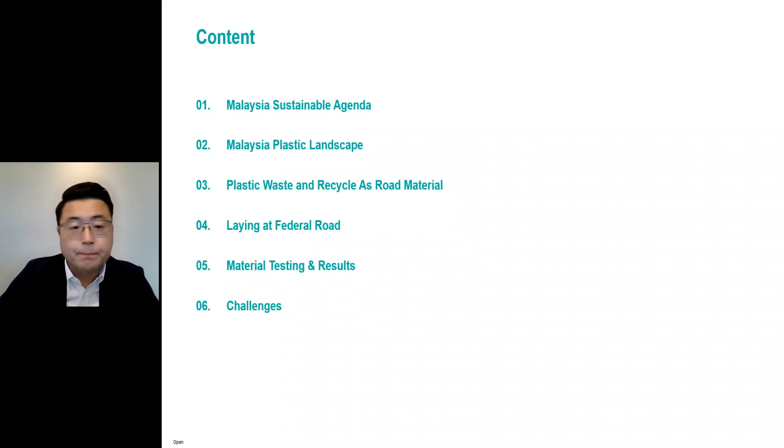So I touched a bit on the Petronas sustainable agenda as well. The development of this waste plastic modified bitumen creates an opportunity for Petronas to employ our technologies and approach towards economic activity. Not only is it environmentally less harmful, but it also preserves resources, which is important in supporting our sustainable agenda associated with net zero carbon emissions through repurposing existing material, besides implementing good practice of waste management and recycling solutions. So Petronas' effort in developing this modified bitumen from plastic waste is also aligned with goal number 12.

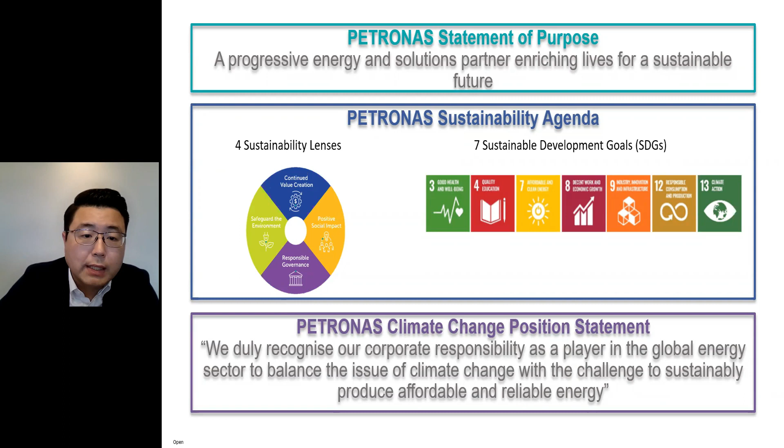Okay, now we jump into the Malaysia plastic landscape. So just now I mentioned about Goal 12, which is responsible consumption and production. So how well are we doing in terms of recycling? As you can see, tonnage of material recycled includes plastic, aluminium, paper, glass, steel, battery, and other recyclable items. We can see millions of tons of waste are recycled every year, and the trend is increasing, from 28.1% in 2019 up to 31.5% in 2021. This has been kept tracking, just that 2022 has not been reported, that's why my data stops at 2021.

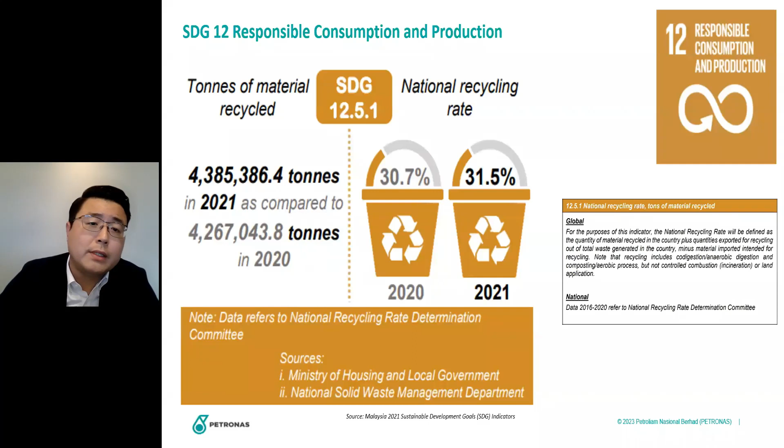Okay, so what has actually been recycled all these years? Next we look at this table, which shows what kind of material has been recycled throughout these few years. Of course you can see plastic waste, aluminium every year, and also glass, steel, battery, and others. So our focus now is actually on the plastic.

As you can see, plastic surprisingly went from 1.5 million, jacked up to 2.7, and dropped down to 1. I believe in 2020 it's because of the pandemic, it used a lot of plastic, all these things, and in 2021 it reduced back. So yeah, a lot of people will say 2020 is actually not appearing well. So fine, let's look into the plastic.

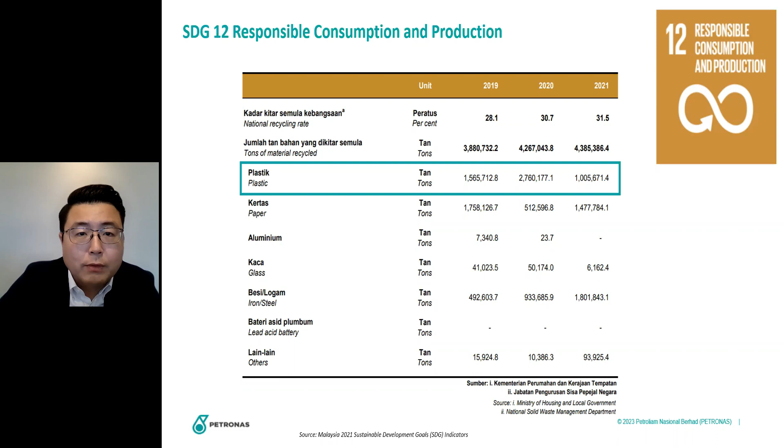Okay, so I will be focusing on these 4 plastic resins, which are PET, HDPE, LDPE and PP. These 4 major plastic resins are actually being recycled the most and most frequently. The rest have less chance of recycling, I would say, because there are actually 1 to 7 types of plastic here. I'm focusing on 4: number 1 is PET, then number 2 HDPE, LDPE, and PP. So I'll just highlight the importance of all these plastics.

So one of them is PET, which has good thermal properties. By the way, PET is mostly used for our mineral water bottles, the body is actually PET. Another one, HDPE, is a stiff material, as you know. Most of it is food containers, milk and juice bottles, all these things. HDPE is used for food containers, milk or juice beverage containers, which you can see are quite thick, quite hard, and also less transparent.

So another one very frequently seen in the market is LDPE. It's actually a thin film-like material, and it has very high strain, I would say it can have very high elasticity. Yeah, so not elastic, plastic. Okay, so after that, you can see most of it in plastic bags. Even water tanks sometimes use LDPE, which is actually very thick.

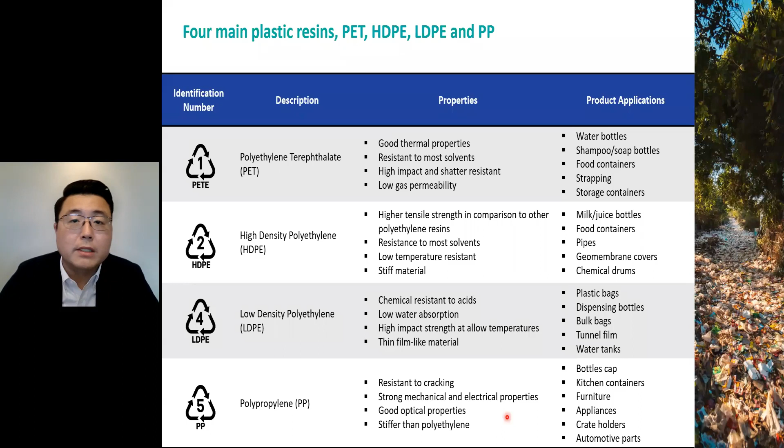Okay, so next we look at how Malaysia produces plastic and what the usage is. This survey is from 2019. You can see that for the two plastics, PET has plastic packaging and PET packaging, and also PET polyester, and the next ones are PP, HDPE, and LDPE.

Okay, so the next one, where does it use for? So you can see that most of the plastic is actually used for packaging, which is 48% of it. The second one is electrical and electronic, and most of this 27% is the PP plastic. After that, the rest is automotive, constructions, households, agriculture, and others. So this is what we used in 2019.

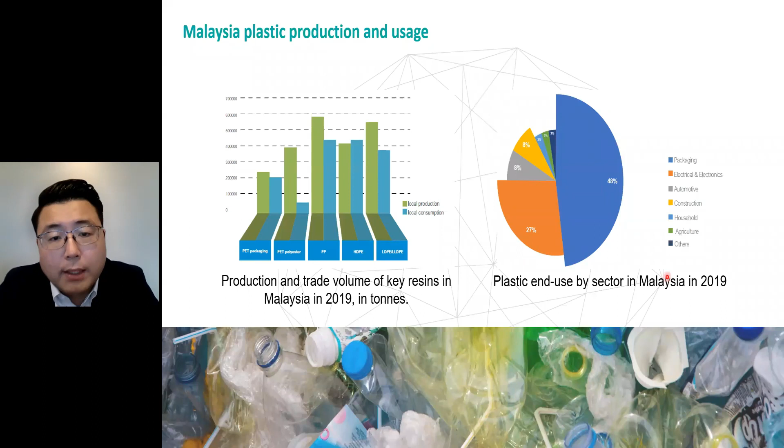Okay, next, how is the plastic waste generation in Malaysia? Do you notice that each of us generates 0.85 to 1.5 kg per person per day, and 0.14 to 0.37 MT - this is not metric ton, it's actually million ton - of plastic waste leaks into the oceans, so we call it marine waste. It's actually quite serious, and it's estimated that by 2050, plastic will be more than marine life. So this is quite serious.

So after that, we can look at the post-consumer plastic waste generation, which is mostly from individuals. In 2016, it was 1.07 metric ton, and it increased to 1.4 metric ton by 2019, and this problem keeps increasing.

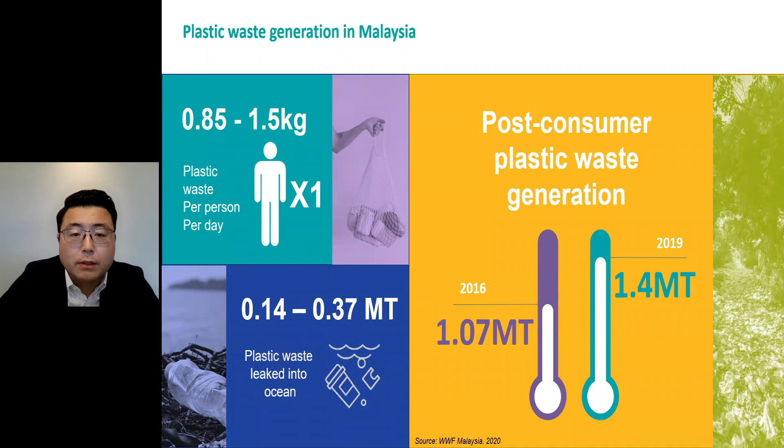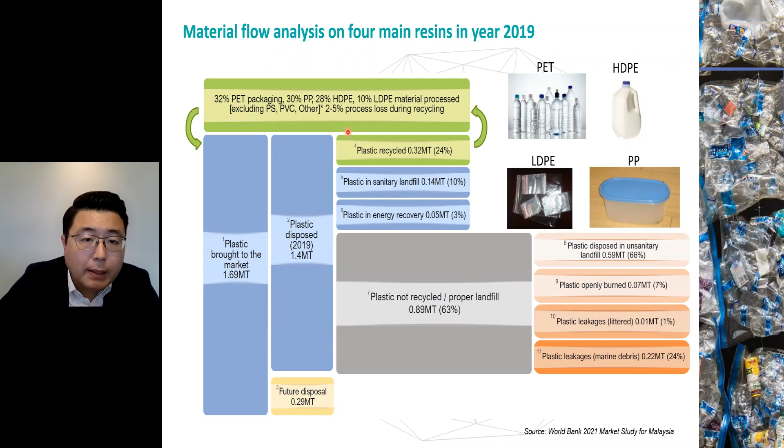Okay, so next we look at this value thing. What is CFR? CFR is actually the collected for recycling rate. So they did a study in 2019 on how much plastic has been recovered. PET is recovered the most, because it's the easiest to be recycled and collected. Then second will be PP, then subsequently followed by HDPE and LDPE. So you can see all these resins covered in this study in Malaysia are the most valuable recycled products.

So if let's say we are able to recycle all this plastic that we have used, which is 1.4 million ton, we can generate about USD 1.3 billion per year. But because only 24% is being recycled, you can imagine how many millions we have lost.

So this has resulted in losing about USD 1 to 1.1 billion every year because we never reuse or recycle the plastic. So when we talk about recycling and reusing plastic, we definitely have heard this term - we call it the new plastic economy, which means we turn whatever plastic waste into something usable.

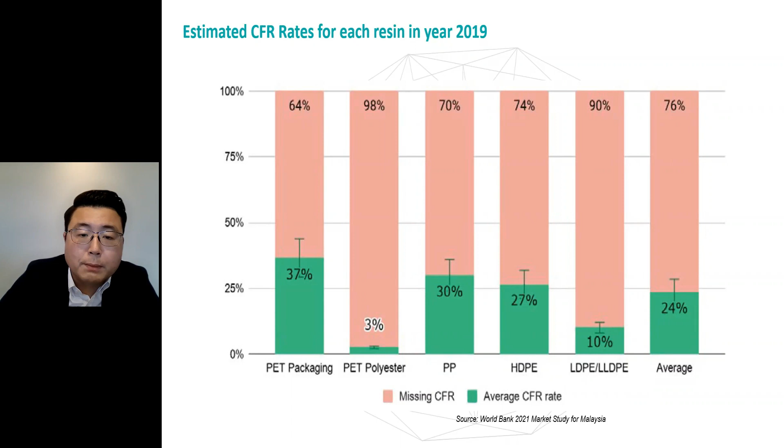So this will be my next slide. What if the plastic can be used and reused again and channeled back into the value chain infinitely? That's why, as I mentioned earlier, USD 1 to 1.1 billion will be generated from the waste plastic. So we have to change our mindset from plastic as a waste to plastic as a resource.

This is one of Petronas PCG's new plastic economy ways of changing it - through education, cleanup, infrastructure, and innovation. One of the major breakthroughs we have is actually to introduce plastic into the bitumen. But the question would be how, and how will it affect the bitumen and the road?

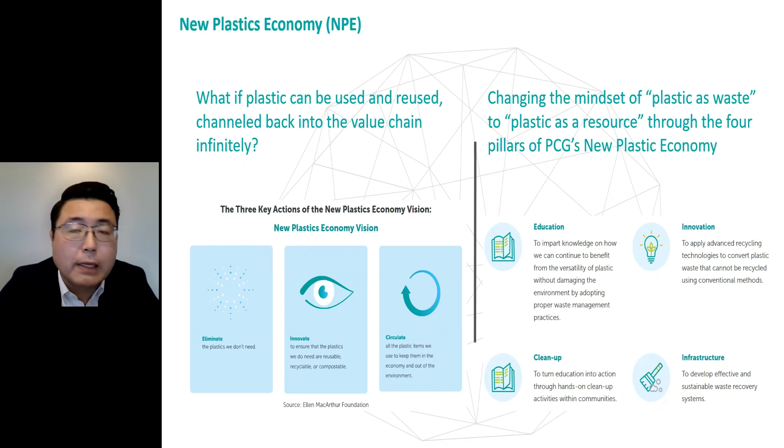That brings me to the next topic, which is plastic waste as a recycled material for roads. Now we talk about roads - the plastic part already covered how it's being wasted. But when it comes to roads, we have a lot of issues as well. As road users, especially engineers and authorities who travel a lot every day, most of the time you feel angry or irritated by road conditions.

All these road conditions, we have compiled into a few factors - these are the pain points we identified during our study. There is actually high traffic load and heavier vehicles that exceed the design intent. It's not that we purposely design lower, but sometimes the traffic is very high, or maybe more than the growth rate, or maybe some illegal vehicles using the road, so we definitely exceed the design intent.

The next thing is that the intensity of heavier vehicles on the road definitely reduces the life cycle of the road - it's directly proportional, heavier load to shorter lifespan. After that, of course, there's lack of maintenance, because you have a shorter lifespan that you didn't expect to deteriorate that fast, so it's out of your maintenance program. That's why normally you see a lot of potholes or road damage due to lack of maintenance.

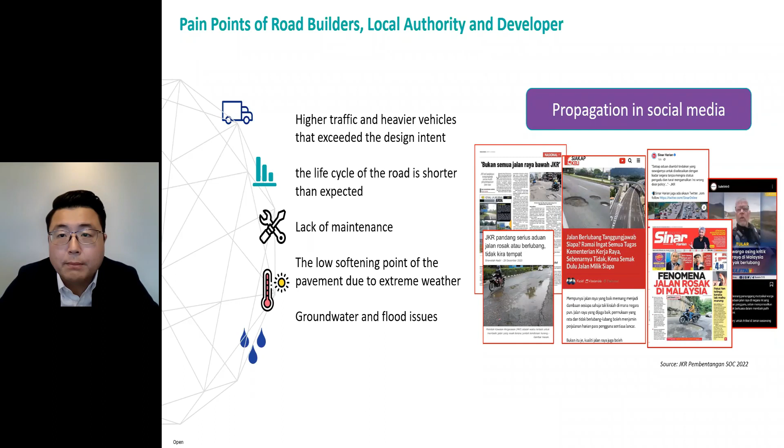This is where the plastic modified bitumen comes in as the solution. So what is the solution? The bitumens or premium asphalts being introduced have safety as the priority, but not only safety - we also look into comfort and sustainability. So the idea is to add recycled content inside the bitumen, and secondly, adopt a sustainable specialty mix that fits perfectly into the global sustainable trend.

The modified bitumen or modified binder offers the following benefits: resistance to rutting, fatigue cracks, cracks due to binder hardening, and improved adhesion of the binder to aggregate. This is what a premium binder can normally offer.

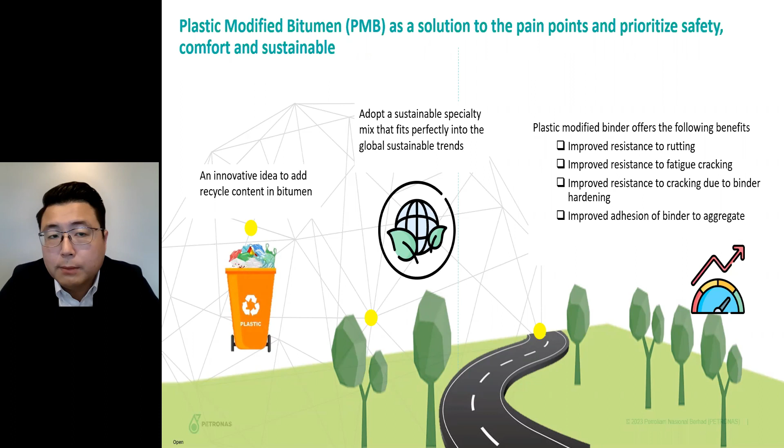So next, what is the goal of the plastic modified bitumen? It is to increase the quality of the road, the safety, and the comfort of the user. Safety, of course, is the topmost important thing we need to take care of, because if you have a low quality road, you have a lot of issues like potholes, and potholes actually kill people.

So this is the one that we don't want to happen. Secondly, of course, you will see a lot of uneven surface and cause a lot of issues on the car, all these things. So that will be linked into the second one, which is comfort. The more flatter or more even the road, the more comfortable ride you have.

So imagine you have a nice car, but then the road - I heard one person tell me what they call it, the road on the moon, something like that. So definitely you don't feel it's comfortable if you're driving on it. So of course the next one that will disturb you a lot is the noise generated.

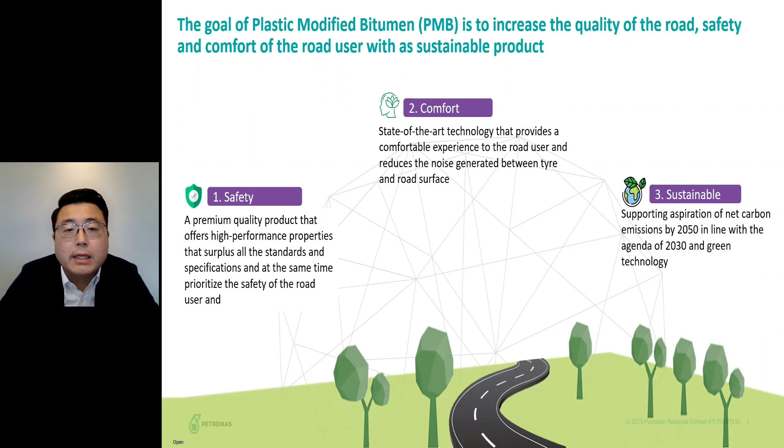The PMB is able to reduce noise generation between the tire and road surface. So thirdly, of course, all these products that we are doing right now are actually sustainable, which is supporting the aspiration of net carbon zero emission by 2050 and in line with the agenda of 2030 and green technology. Okay, so next will be the benefits.

So we talk about the benefits of using this kind of premium modified bitumen. Of course the lifespan can conservatively be extended a minimum of 25%, and that will reduce the OPEX operation cost, which is the reduced maintenance schedule. So that is for the authority or developer.

For the road user, of course, you have safety and comfort, and also reduced noise. For the automotive industry, it will perform better in various weather conditions, and it improves the lifespan of your tires and reduces vehicle maintenance costs, because all these vibrations - and also to minimize fuel and reduce driver fatigue is very important if you have a great road.

Okay, so after that we will also look into the environmental benefit, whereby if we use plastic waste to lay the road, we can reduce up to 16% of the plastic pollution in Malaysia. At least you can see a reduction in landfill, because most of the plastic at the end of the day is actually landfilled, which is using up earth resources and space, which is definitely not a sustainable solution.

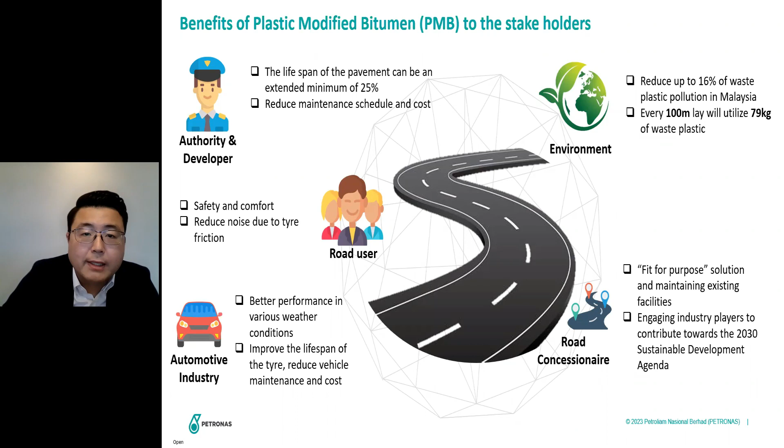Okay, so we've covered all the benefits and how it contributes back to society and the environment. So the next one will be the interesting part - how it's being planned. So this is the plastic modified road, from plastic waste road to the plastic road. So how is it being implemented in the road, and the end product?

You can see here, we started with the waste plastic and also raw bitumen. The raw bitumen in Malaysia right now is 60/70. After that, the plastic is shredded, and then we put it inside the bitumen blending facility. Then the output will be the modified binder. After that, we send it to the premix plant with aggregate. Then the end product can be laid on the road - we call it the plastic road. So you can see here all the plastic waste that we are using.

So after the segregation is done, you need to shred it into what they call plastic flake. This plastic flake, of course, needs to be dried out completely, because bitumen is quite sensitive to water and moisture.

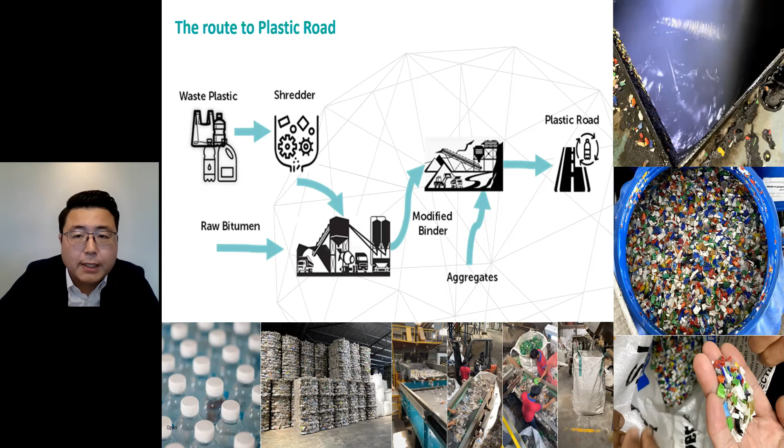So it's about how many years? 1.5 years now from then.

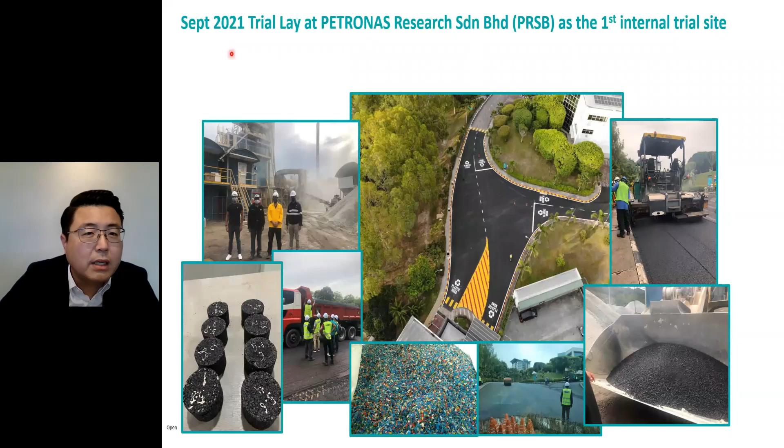So the next one we have done is we expanded our laying into a federal road. Of course, this one we collaborated with JKR to lay at the federal road, which is at FT 185, Jalan Simpang Pulai Lojing. I'll let you know further details on this road later. But you can see that all this process, from the internal lay up to the external lay, uses the same material, which is plastic modified bitumen. We are quite happy with the result, which we'll show you later.

Okay, let's move on. I'll be focusing on this federal road laying, because the internal one, due to lack of traffic, cannot be a showcase. So we make this the main one.

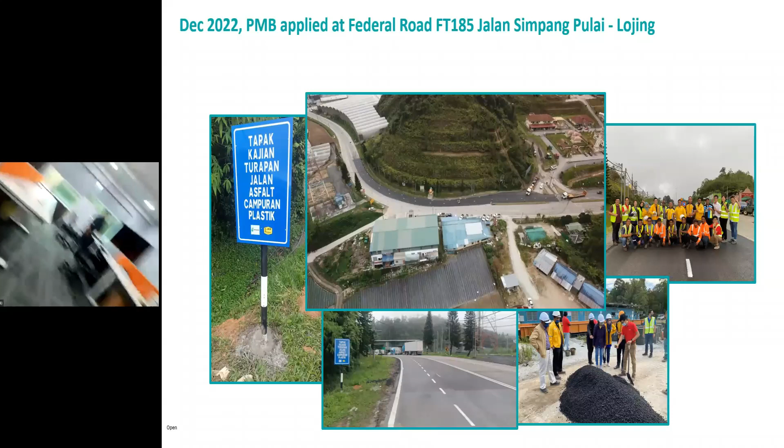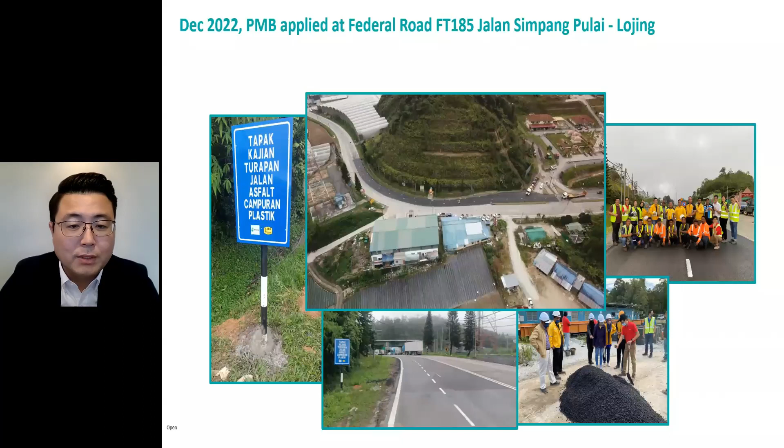Next, we move on to this laying. This project is the laying at FT 185. So next is the location. This laying is somewhere around between Perak, Kelantan, and Pahang, because the road is actually crossing these three states. If you zoom in, it's actually here, crossing these three states.

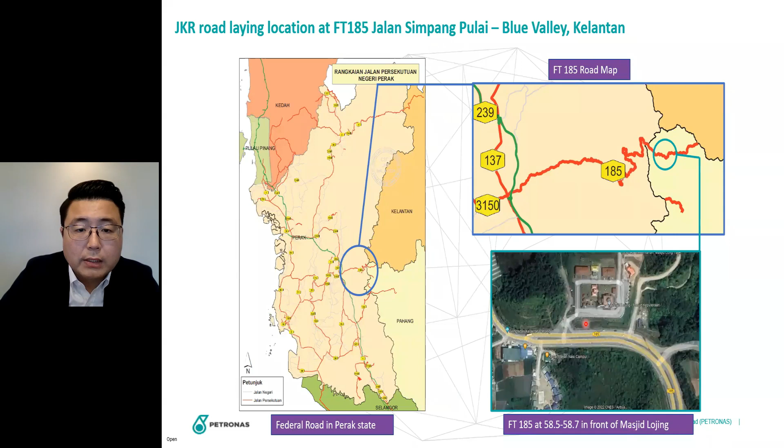So the place where we are laying is somewhere around here, which, if you look it up on the map, is actually in front of Masjid Lojing. So the next one will be this.

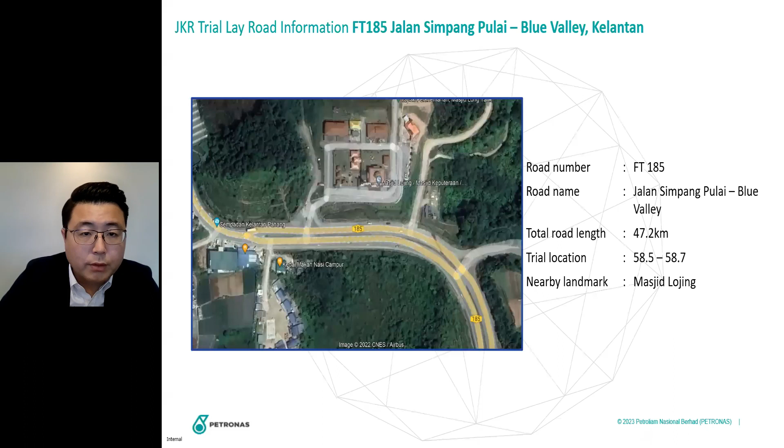Okay, so this is actually the exact location where we do our laying. The road length is about 47.2 km, which is why it crosses from Perak until Pahang and also Kelantan. And the nearby landmark is actually Masjid Lojing. This is the details of the trial sections and also the control sections.

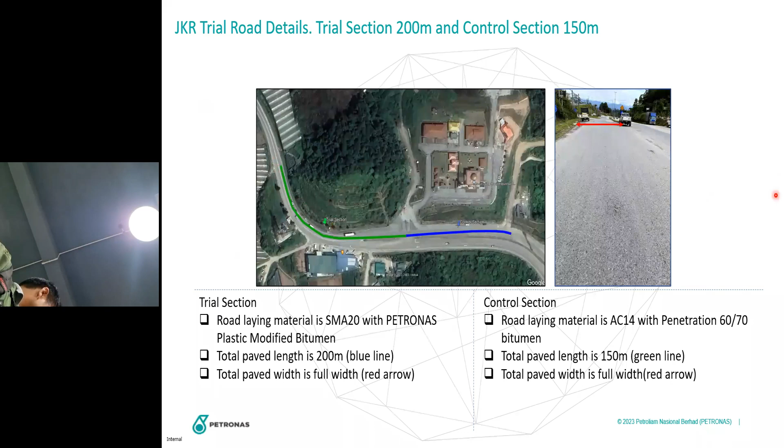So these trial sections, the blue color one is the... this blue section is the 200-meter with the PMB.

So for this PMB, the details we are using SMA20, and the green color is actually the control area, which is requested also by JKR authority to have these control sections for monitoring purposes.

But it is using AC14 60/70, and the pave length is 200 against 150. Supposed to be 200 because up to corner level, so which is not a fair comparison. That's why we don't proceed, and we shorten it.

And also the pave width is actually the full width. This is shown in the red color, which is the full width of the road. So total length is about 350 meters.

And some of you might be asking, so it happened that you want to do a comparison, why not use AC14 premium mix, which is the AC14 with modified bitumen, against the AC14 with the standard bitumen.

So the reason behind it is actually we want to test our bitumen technology. It's very important to note that we have done the initial assessment before the laying, and we found out AC14 is unable, to be frank, to resist the high loadings and also high traffic.

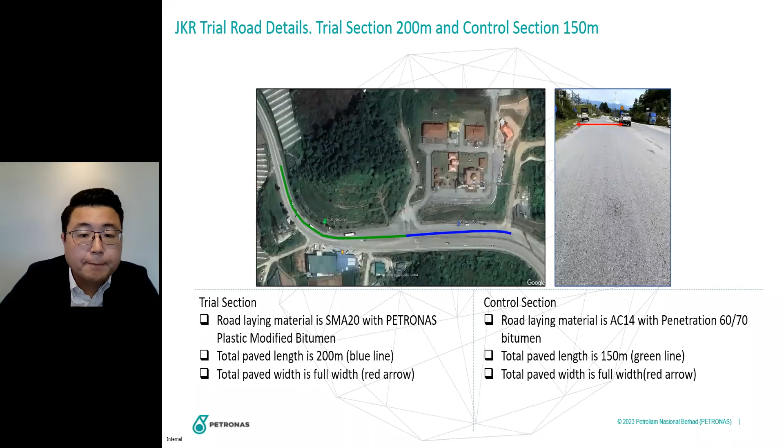Next, I will show you the material testing and the result.

So of course, what kind of specification are we referring to, for SMA20 we are referring to JKR, and also the fiber pellet, because for SMA you need to use fiber. And of course, so far we are referring to the polymer modified binder, because one of the requirements in JKR when you want to mix with SMA is to use performance grade of 76.

So this performance grade of 76 is definitely the polymer modified binder, the only binder that's stated in the 2008 S4 specification.

So that's why our PMB also, we are referring to this plastic modified binder spec. Of course, later on there will be a specification specific to this plastic modified binder.

So in this polymer modified binder, they are targeting PG76. That's why, as you can see here, the dynamics are tested to 76 degrees, which is also the PMB, the plastic modified binder, we also tested to this 76, to qualify that this bitumen is able to achieve this grade, PG76.

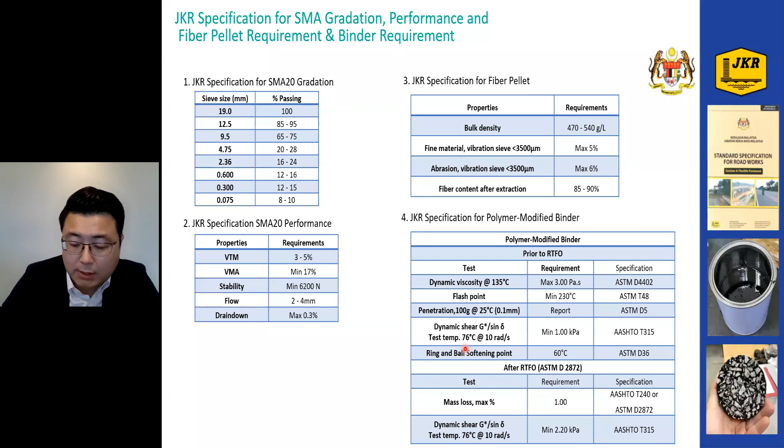Next, I will let you see some of the tests that we have conducted for this modified bitumen and asphalt. This kind of test is also one of the requirements that JKR imposed on us, that they need to see this result before they get approval.

To be frank, I'm showing all this result to you. Most of it has already been submitted to JKR.

And for the plastic modified binder, of course you test all these properties, including the dynamic shear of unaged and also short-term aging, RTFO, and also the compacted mix. This is all the normal tests, and also they have asked for the resilient modulus, dynamic creep, Cantabro, semicircular bend, and also wheel tracking test. And of course, the core sample will be tested for density and also the layer thickness.

So all this photo, if you can see, this picture particularly is actually the PMB. It doesn't look any different from other bitumen, to be frank. This is the Marshall sample, from the loose sample, and this is all the core samples from the road.

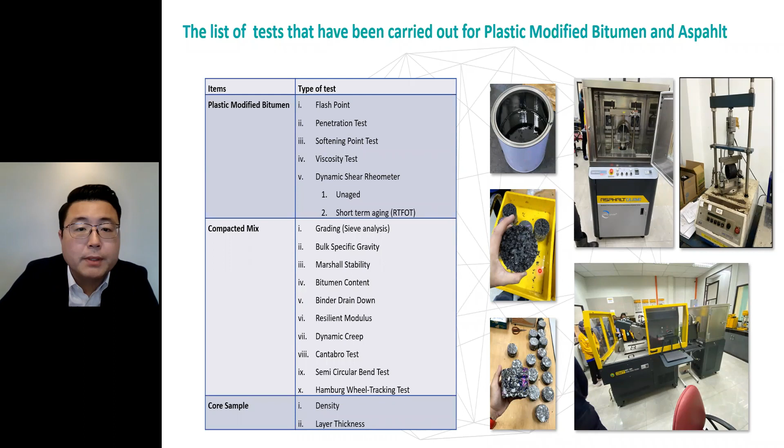I'll tell you about the requirement of the PMB. We are actually achieving the requirement of polymer modified bitumen. That's why in our test, we also tested the normal or conventional PG76 against this requirement, and also compared it to the PMB, plastic modified bitumen. Whatever test we conducted is able to achieve PG76 easily. It's worth noting that 60-70 is actually the penetration rate, but when you come to a higher, better binder, normally you call it PG76.

In fact, if you convert into a binder grade, it's actually PG64, which relates to the 76 degree I mentioned just now. For binder grade 64, they put it back to 64 degrees so that you can achieve a minimum of 1 kPa for the dynamic shear, mostly for the rutting purpose.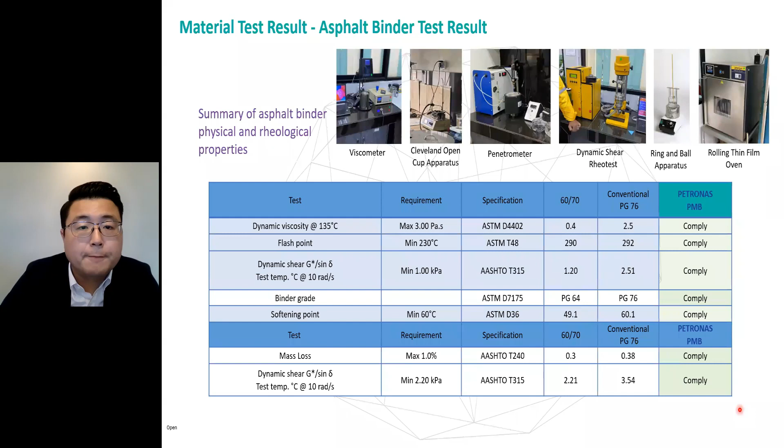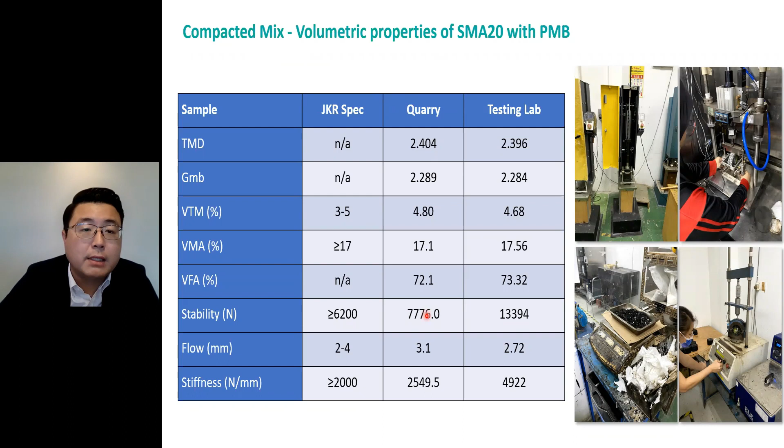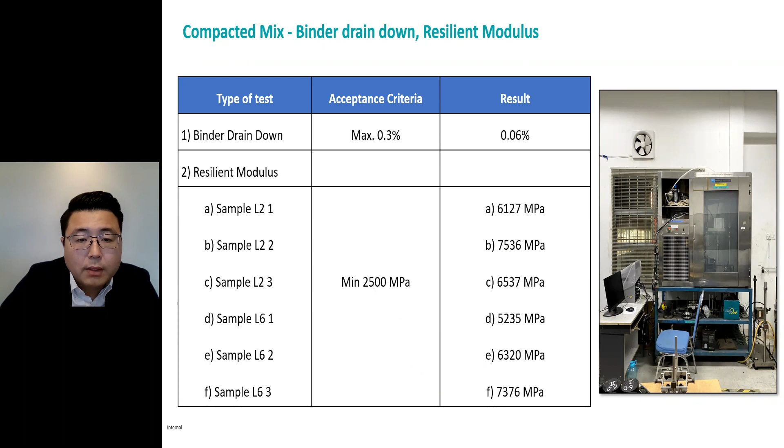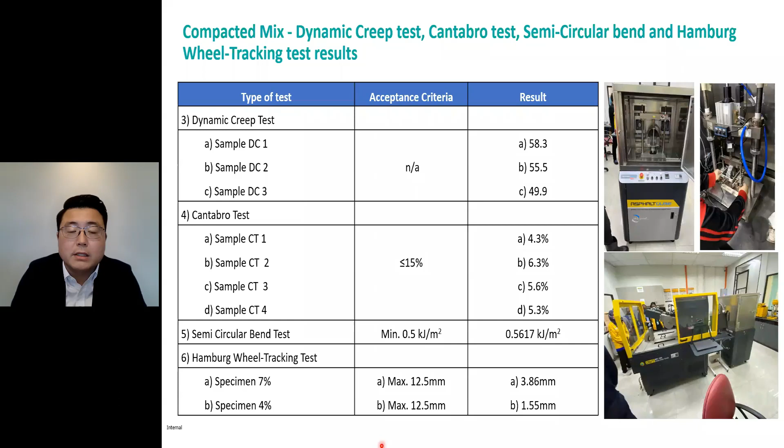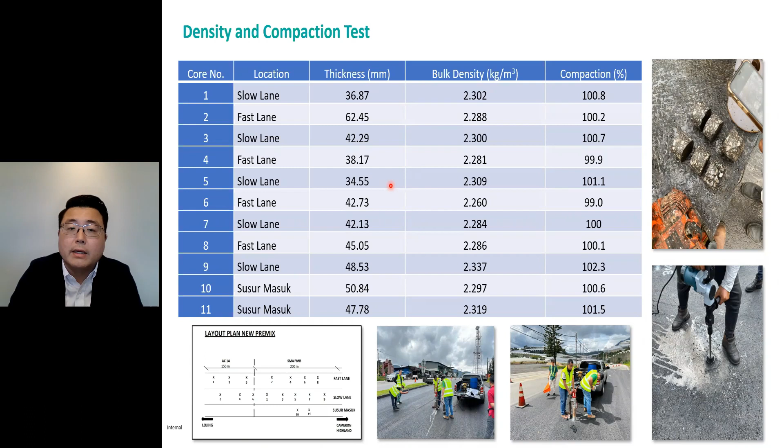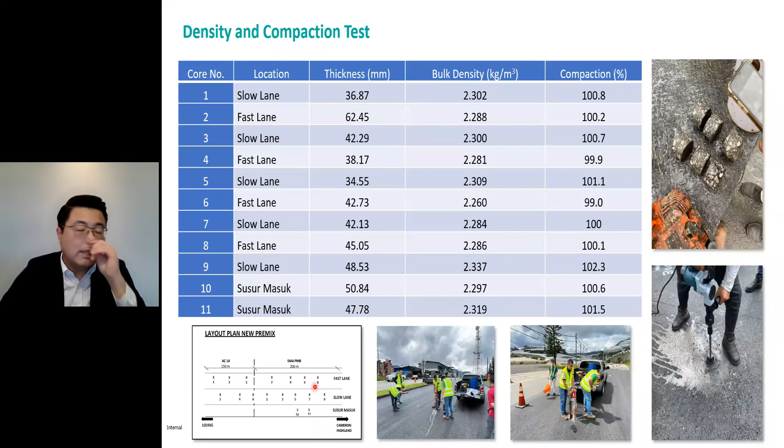Okay, so if you look at what is slow lane, fast lane, if you look at this draft sketch, the sketch is actually because the road is 2 lanes with one deceleration lane. So we put it as a fast lane, of course the most right lane, and the left lane is actually slow lane, and the most left one is actually the deceleration lane.

So this is the number of cores that we have done. And of course, for AC14 as a control area, we also need to test it. This result is not going to be shown because my focus will be on SMA.

So this is all the photos that they have taken. This is taken 24 hours after the lay. You can see that the road has not had any road marking put on it yet.

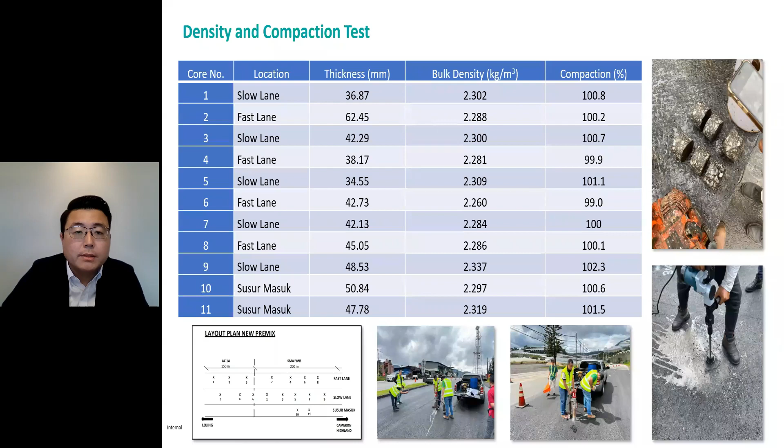So, okay, all from what I have presented just now is about the performance and the mixtures, and how it is whether you can achieve the key aspects or not. You can see all the results are actually in very good shape, I would say.

So next, of course, for any new technology there will be a lot of challenges, because it's something new whereby if you don't have the spec, people will question whether it can be done, or how it behaves, especially plastic, which you use every day but never thought of putting inside this mix. Also research-wise, if you search through ResearchGate or even the internet, not much info or research has been done. So you face a lot of challenges during this stage, especially since this was actually done like 3 to 4 years ago.

So now you can slowly see all these plastic things coming out, but most of it is still under the research phase, I would say. So of course, we have identified a few challenges during the lay, of course.

So the first one is the challenges in the premix plant. One of the problems, actually the same goes for most modified binders, is that we need to maintain the temperature. Because for any modified asphalt in the market, you require higher mixing temperature compared to the standard unmodified bitumen. The standard bitumen temperature is about 160 during mix. So definitely for modified bitumen, it requires higher.

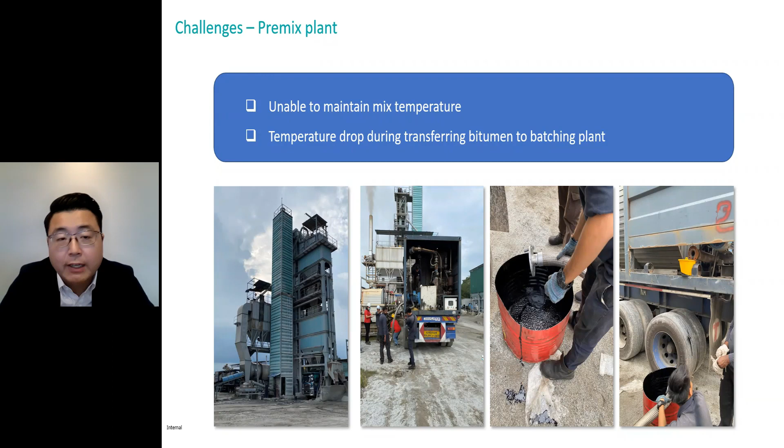Next will be during the construction. The construction in this, what do you call it, Jalan Lojing or Simpang Pulai Lojing area. As you know, this is one of the coldest areas in Malaysia, in Semenanjung.

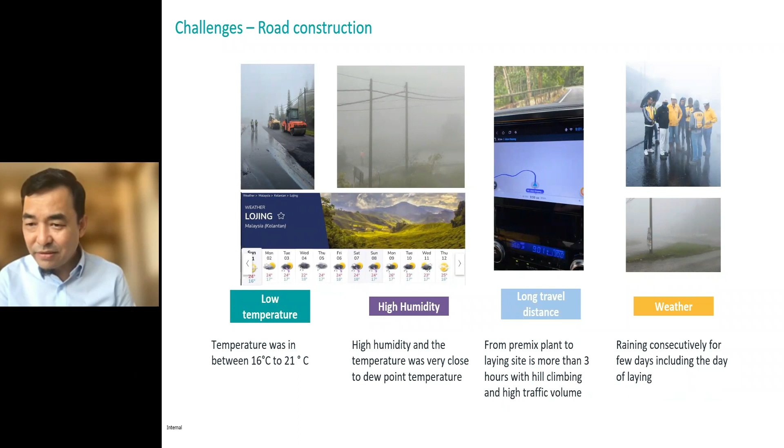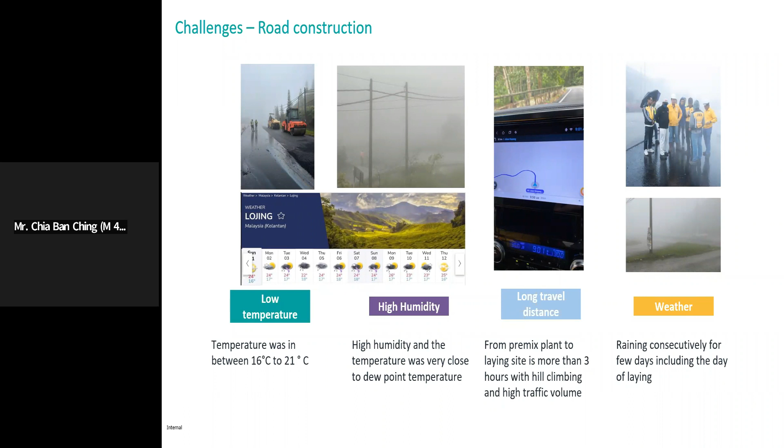Sorry, someone talking. Mr. Chia. Hello. Mr. Chia. Ban Ching, can you mute? Okay, okay, mute. Okay, thanks.

Thanks, Dr. Zara. Okay, yeah. The next one is actually during the road construction. As you know, this area is one of, I would say, one of the highest areas in Cameron, because I needed to travel 30 minutes from Tanah Rata to get there. And when you are getting there, the road is actually going uphill, not downhill, so it makes a lot of trouble for us.

So okay, first thing, of course, is the low temperature. We have been monitoring the temperature there for more than 2 months, 2-3 months, and we look at the temperature - it's always either low temperature or it's actually raining. So it's causing us a lot of problems, because you don't want to lay your road during raining conditions. So of course, this is one of the biggest challenges in our road construction.

The next one is high humidity, and actually very close to the dew point temperature. What is the problem if you have high humidity? It means that whatever prime coat or tack coat you put cannot dry. Even if you use the rapid setting, the RS type of tack coat, you still need to wait for a few hours to dry, which tremendously jeopardizes all your laying work.

So this is one of the problems that I'm facing during the laying.

The next one is of course long travel distance, because you hardly find a premix plant in Cameron Highland, to be frank. So the nearest one is actually in Kelantan or in Perak. Both require about 3 to 4 hours to travel up, especially near public holidays or during working hours when there's a lot of traffic there. So we face a lot of problems during this, because as I mentioned, temperature is one of the sensitive elements in all premix, or even the premix hotspot.

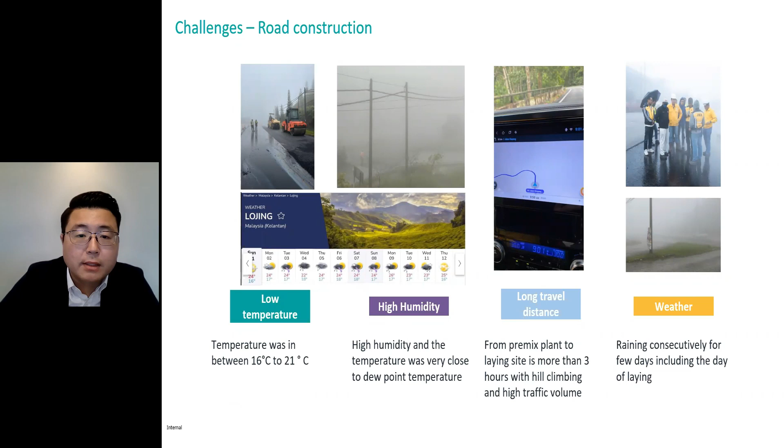Okay, it's very challenging. Next is the existing road conditions. I would like to share with you how serious the road damage is, and this is why we decided to go for SMA - not even 14, but actually 20, so that it can help resist the higher load, because we see a lot of Balak trucks passing by. Even when we were sitting there for discussion, we saw a lot already.

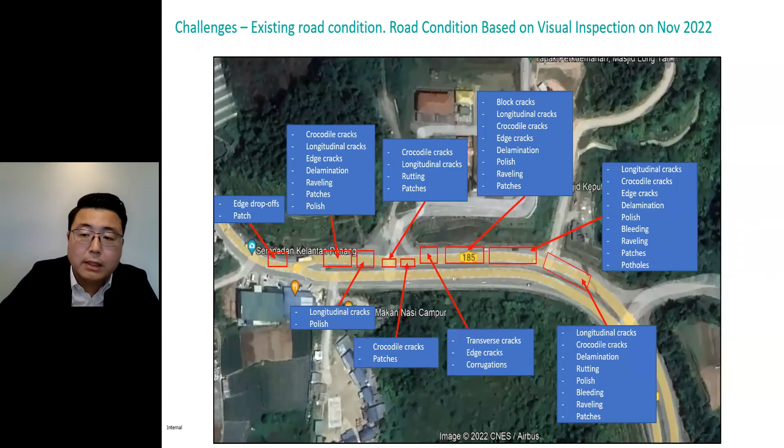So this is the defect that we identified along the trial lane. You can see cracks are common, patches are common, rutting is also common. Delamination and raveling are especially common, due to lack of maintenance. This is, for me, kind of a perfect place to test my product, of course. I'll show you some photos of how serious the defects are - you can see a lot of crocodile cracks, longitudinal cracks, and also block cracks.

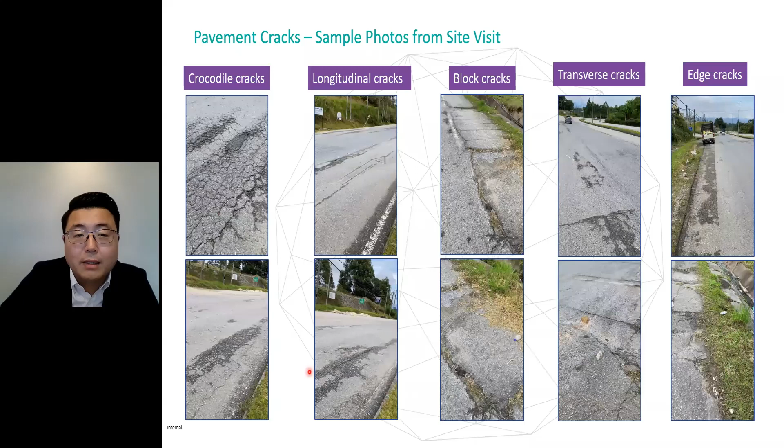And you can look at the road - you will see a lot of wet spots. That is actually another serious issue that we are facing, whereby there's underground water. Next you can see corrugation, depressions, rutting is everywhere - you just name it, you can find it.

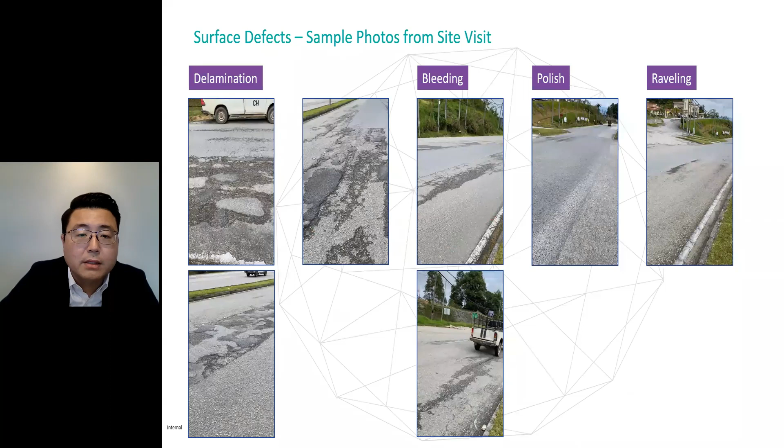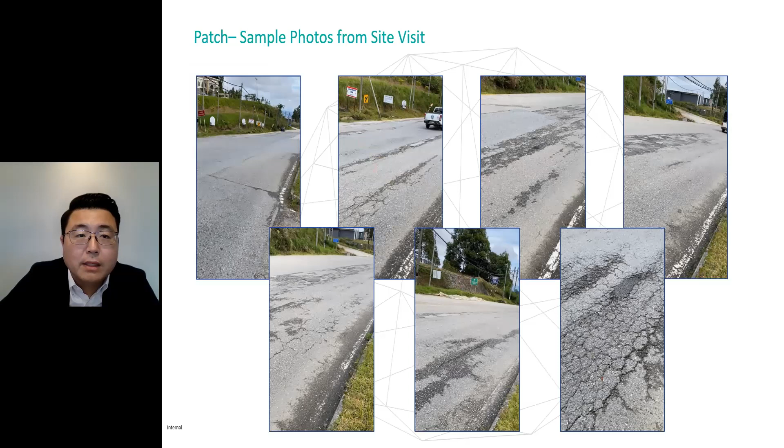After that you have delamination, because the patching is done by locals and it's not properly done, so after that they have delamination. You also see bleeding, polishing, raveling everywhere. After that, patches - because they repatch, but at the end of the day it comes back within months. After that you can see the pothole, the edge issue, and even drop-off happened.

So we have done some work because of this issue. We are very worried that we will jeopardize our technology trial, so we did a pre-assessment on this road. We have done core tests - of course, definitely need to do.

Actually we have an interesting finding, whereby after we cored that sample, the core hole kept on refilling with water. The water, I think, will fill up to the surface area within 7 minutes, after 7 to 15 minutes - it depends on the timing. So it will fill up pretty fast. So we definitely identify this as the main cause of the issue that all these things happen.

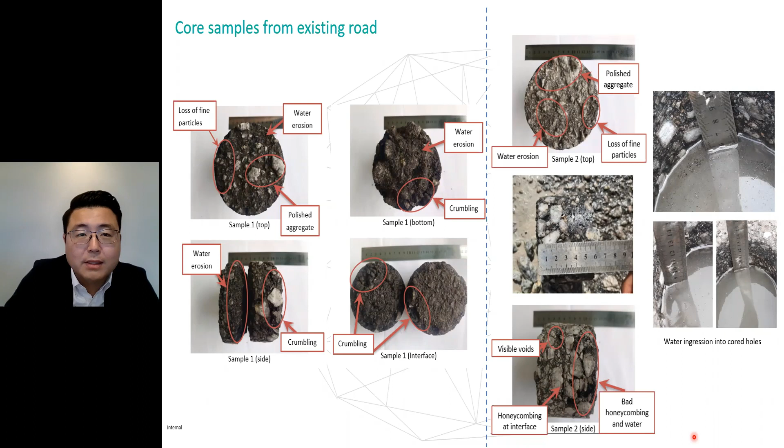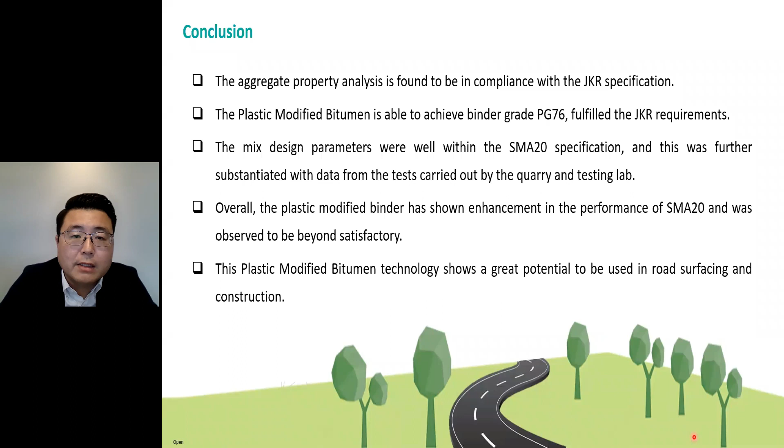So next, the conclusions of this laying: the aggregate, of course, we need to test before we do a trial - it's actually compliant to JKR spec. The plastic modified bitumen is able to achieve a binder grade of PG76, which also fulfills the JKR requirement. And the design mix of the SMA spec, the design SMA, is able to achieve the JKR spec, further substantiated by the data tests that have been carried out by the quarry and also the test lab.

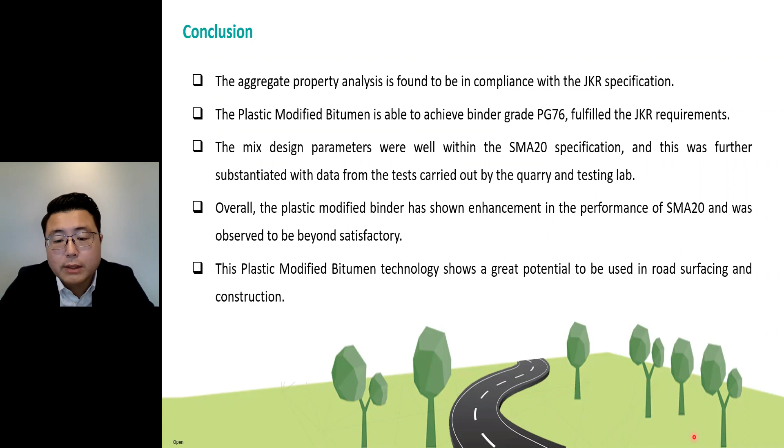Overall, the binder shows enhancement for SMA20 and also observed beyond satisfactory. The plastic modified bitumen technology has shown great potential to be used in road surfacing and construction. So this is the overall plastic modified bitumen material or product presentation, from laying until testing and until the end result. Yeah, this is my presentation for today.

Okay, now you can actually start to ask any question if you have.

Thank you very much for sharing this interesting topic, because now we can see so many plastics outside - how we recycle, that's the new thing, something we reduce about the waste, everything now.